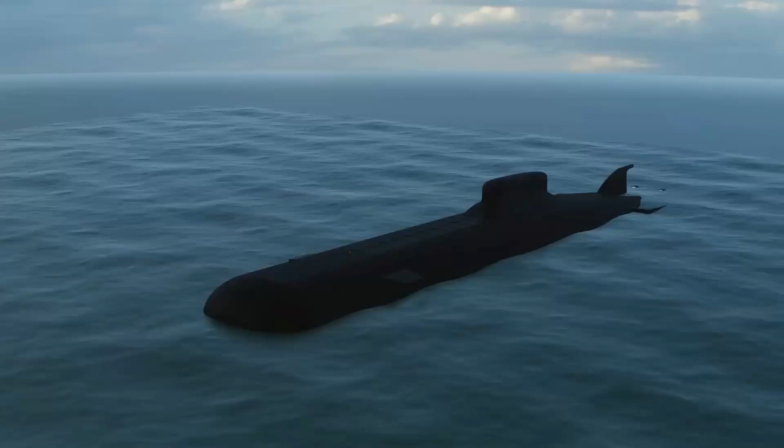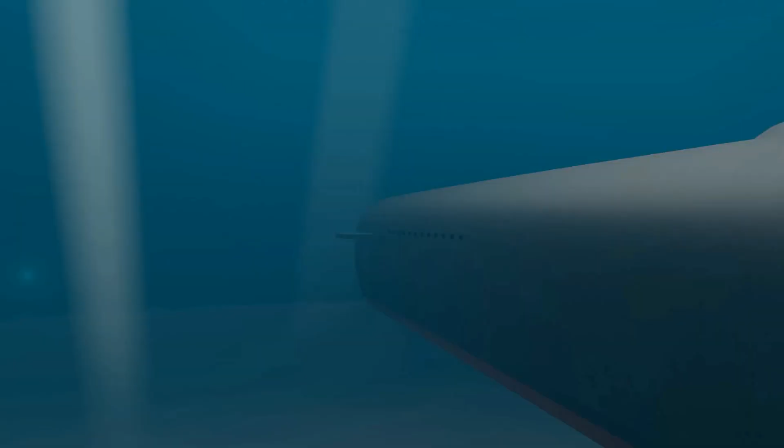It is a Typhoon-class nuclear-powered submarine whose weight is 48,000 tons. And there is a huge ship on the side with a load carrying capacity of 240,000 tons. It is a matter to think that such a heavy ship floats comfortably on the water, and the submarine can easily go into the water while it is 1/5 in weight.

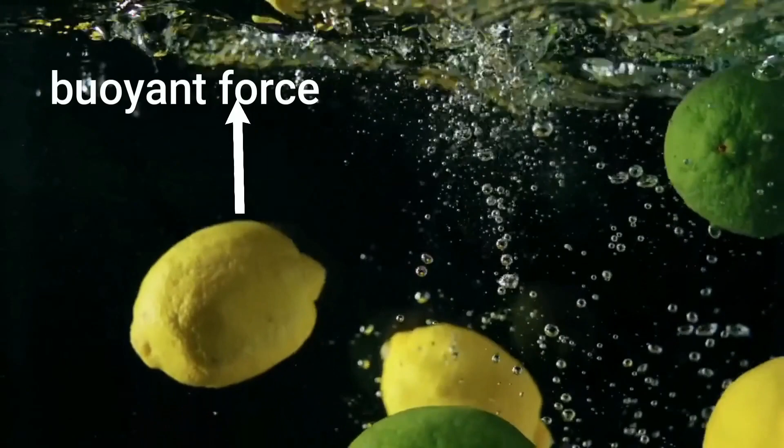When any body is in water, the water exerts an upward force on that body, which is called buoyant force, and the gravitational force tries to pull that body down, and both these forces are available in the water. Using buoyant force, Archimedes gave a principle that, when a body is immersed in water, that body will start displacing water. Now the weight of the water displaced by this body will be equal to the buoyant force exerted on it. It is very good. But still we do not understand anything.

The weight of this submarine is 48,000 tons. When it stays above the water, it is assumed that it can displace only 40,000 tons of water. Now it will be equal to 40,000 ton buoyant force, which means 40,000 ton water is exerting upward force on this submarine. But I just told that there is also a gravitational force whose formula is mass times gravitational acceleration. Now if the gravitational force exceeds the buoyant force, the submarine will sink.

So the simple thing to do is, when the submarine is about to go into the water, to increase the gravitational force. It will start increasing its weight, and to increase the weight, there are tanks on the bottom side of the submarine, which will start filling with water, and as soon as the gravitational force is high, the submarine will start going down. The large ships displace a lot of water so that the gravitational force does not dominate and the ship moves comfortably on the water.

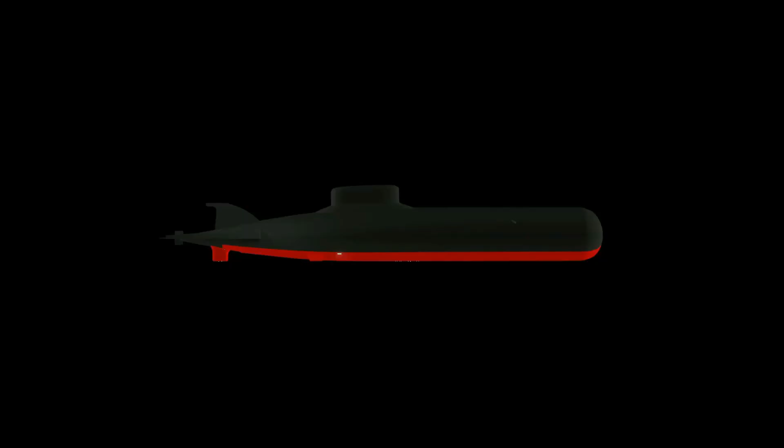The Typhoon-class submarine is still with Russia, whose power we are yet to know. Nuclear weapons can also be launched from this submarine, and it simultaneously carries so many weapons that the whole Earth can be destroyed. This submarine is 574 feet long, 76 feet wide, and 38 feet tall. If it is compared to a human, it will be something like this.

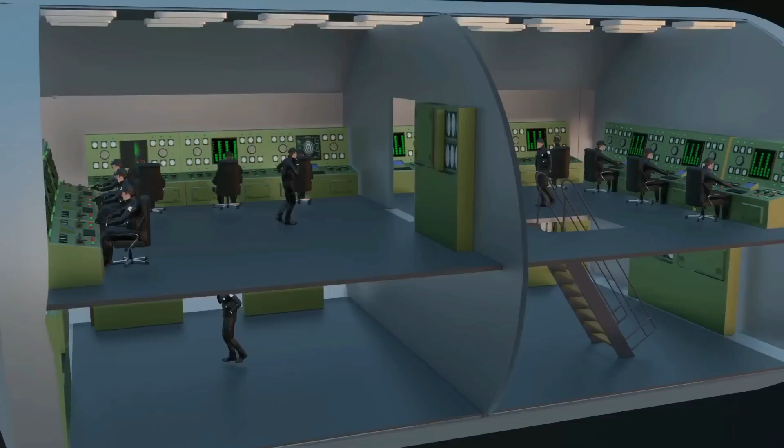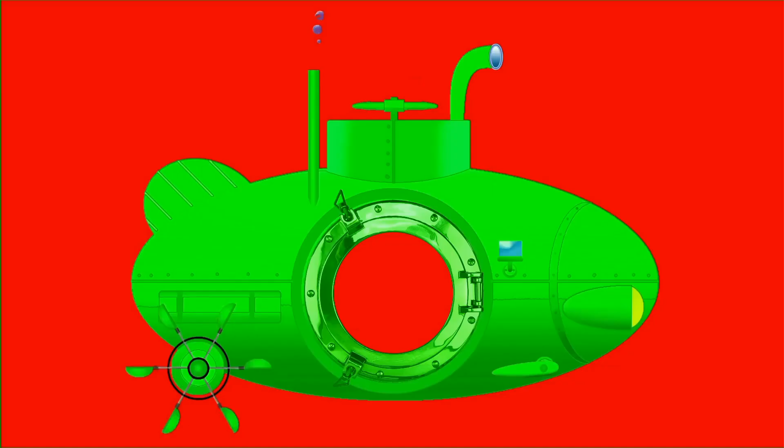Living facility is available for 160 people in this submarine, and it can stay underwater for 120 days without coming out, whereas diesel-electric submarines have to come up once in 10 or 15 days, because the diesel engine emits a lot of exhaust due to which bubbles are created in the water and its privacy is lost. That's why the diesel submarine charges the battery on the surface and then goes back into the water.

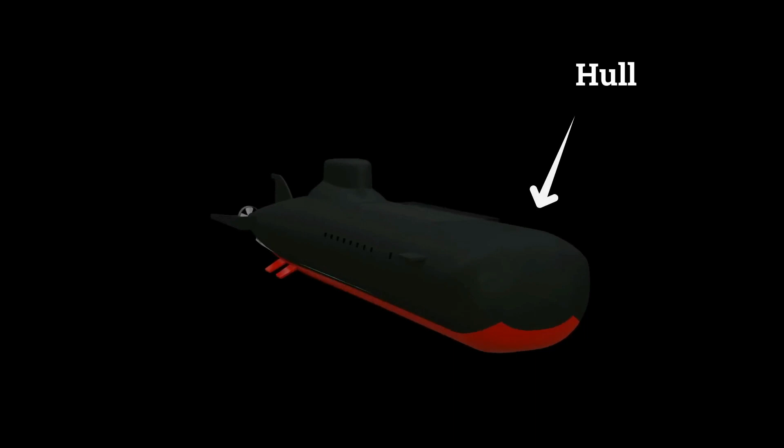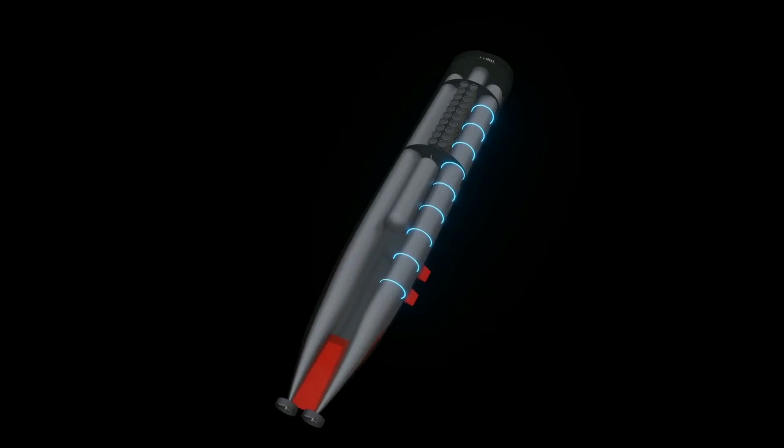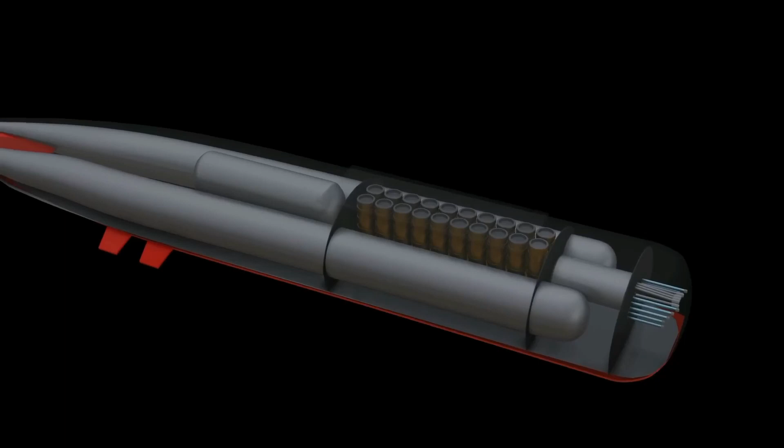The outer body of the submarine you are seeing is called hull, but inside it there are total 5 hulls. There are 2 large main pressure hulls on the side, which are made of strong steel, and each hull is divided into 10 compartments. And in these compartments, sleeping room, kitchen, bathroom, gym facilities are available for crew members. On the rear side, there is the engine room, that has the nuclear reactor for power generation and propulsion of the submarine. The submarine has a torpedo hull at the front, from where the missile ammunition is launched.

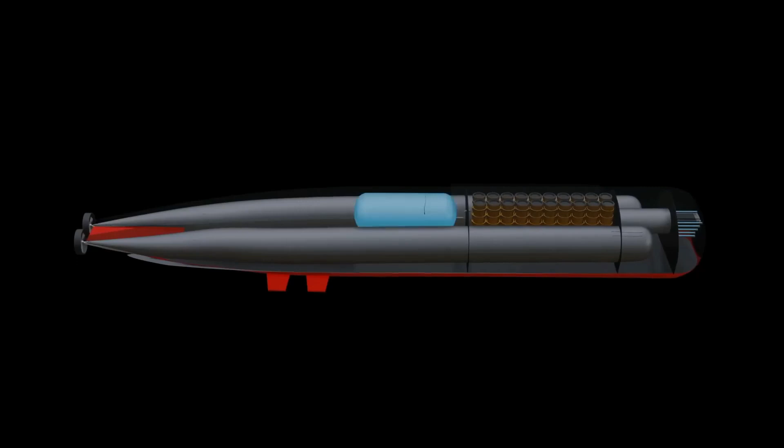The torpedo compartment does automatic launching, it just needs to be signaled from the control room, and the control unit of the submarine is in its center portion from where the crew members work. Submarine driving control, going down in the water, going up, surfacing, etc. All are controlled from here, but the interesting thing is that there is no window to see outside the submarine. Everything is controlled through sensors from its control room. Submarine is just like a box, which makes minimum movement with water.

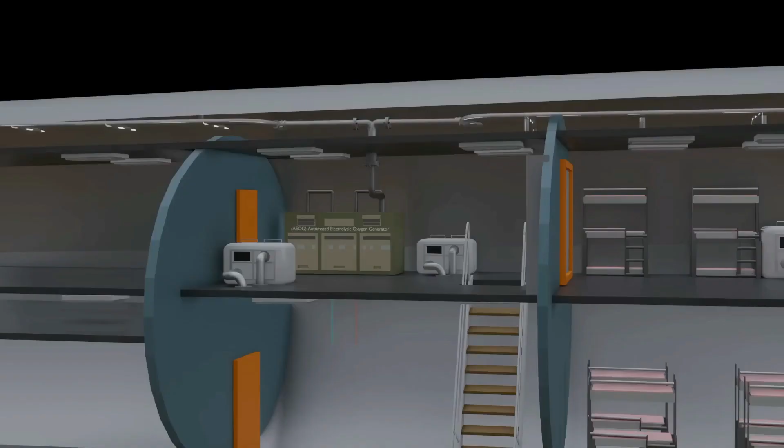Inside things inside, outside things outside, so an electrolyzer is installed to supply oxygen to so many crew members. Electrolysis is a process in which oxygen is extracted from water. If you know, oceans supply 50% oxygen on Earth, so oxygen is much available inside water, but electrolysis is used to separate it from water.

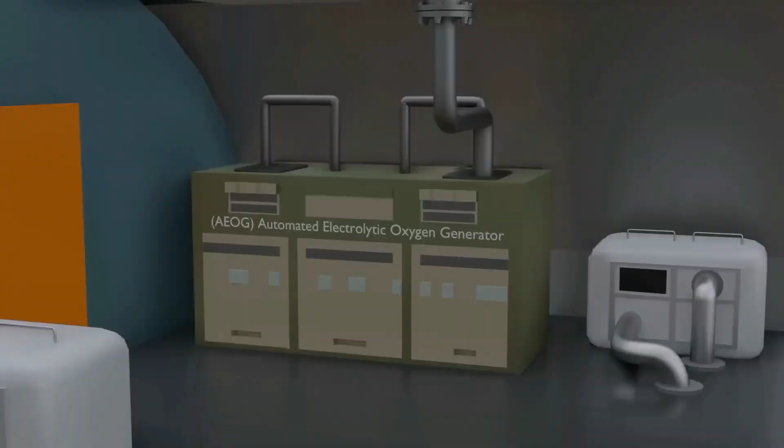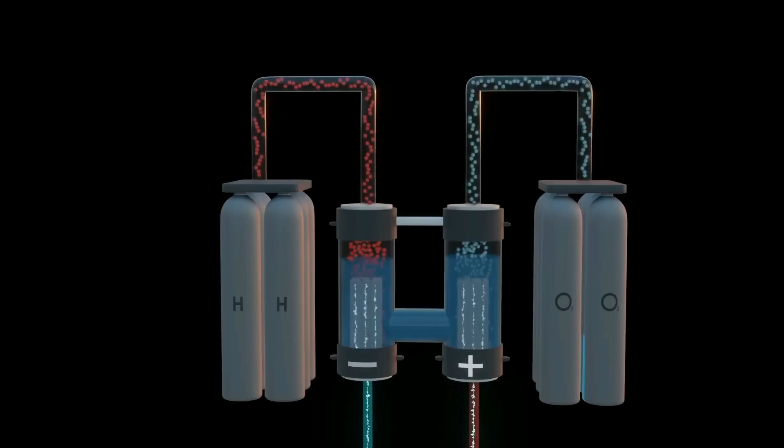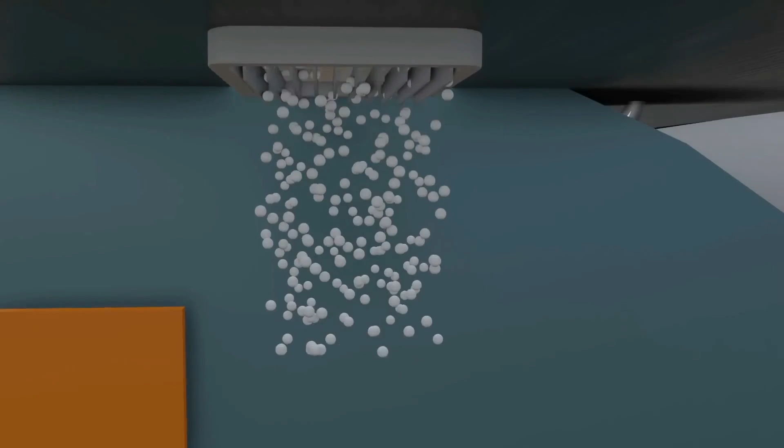There are 2 graphite rods in different chambers. When DC supply is given to them, oxygen will be released from the positive electrode side and hydrogen will be released from the negative electrode side. Both these gases are stored in separate tanks. Oxygen is supplied to the entire submarine through these pipes, and hydrogen is released outside. Submarine has a powerful electrolyzer, which produces 4,000 liters of oxygen in 1 hour. Yet oxygen is supplied periodically.

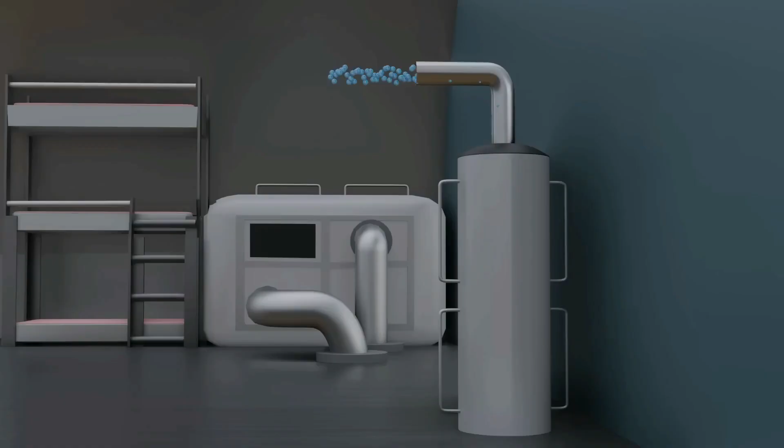There may be a power failure, and this system may not work, so for backup, chlorate candles are used for oxygen supply, which do not require any external power source. These candles are sealed in a steel canister.

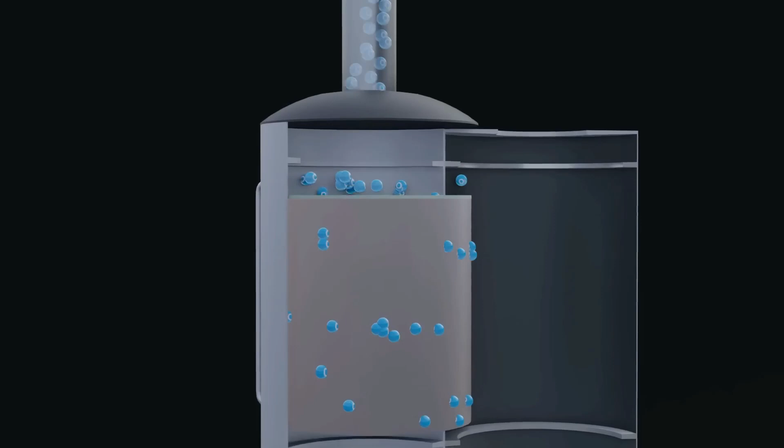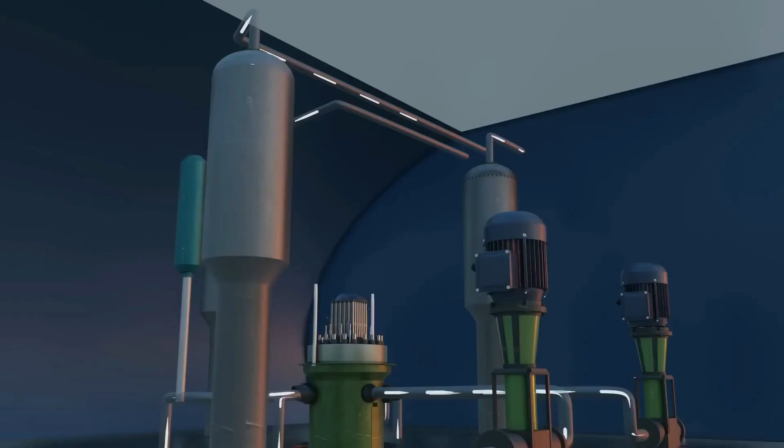Iron powder is filled in the middle of the candle and sodium chlorate on the side. So when oxygen is needed in an emergency condition, the iron powder is ignited, which generates heat, and the chemical reaction starts at 600 degrees Celsius. And oxygen is released in tremendous amounts.

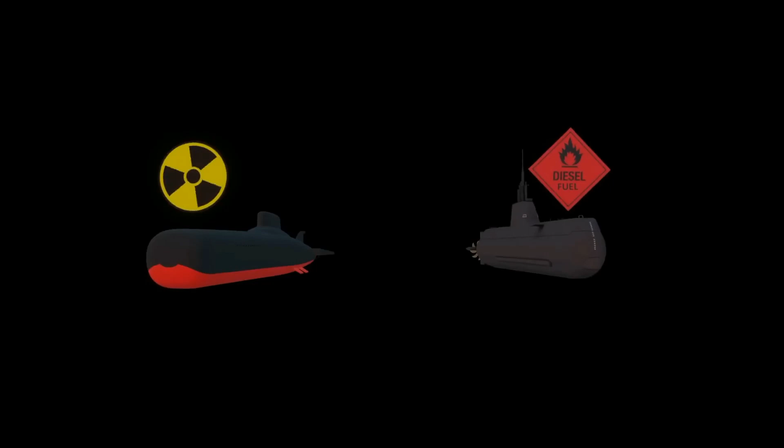In a nuclear-powered submarine, a nuclear reactor is used for power generation and to propel the submarine, in which uranium-235 is used as a fuel. This reactor can generate continuous power even underwater, because unlike a diesel engine, it does not leave any exhaust outside. If we compare it with a diesel-electric submarine, then 5 million liters of diesel is equivalent to 4 kilograms of uranium.

And the more interesting thing is that there is no need to come out for refueling a nuclear-powered submarine, because when the submarine is manufactured, so much uranium is filled in it at the same time that it does not have to do any refueling for the next 30 years. Because uranium is not like diesel or petrol, which needs refilling often.

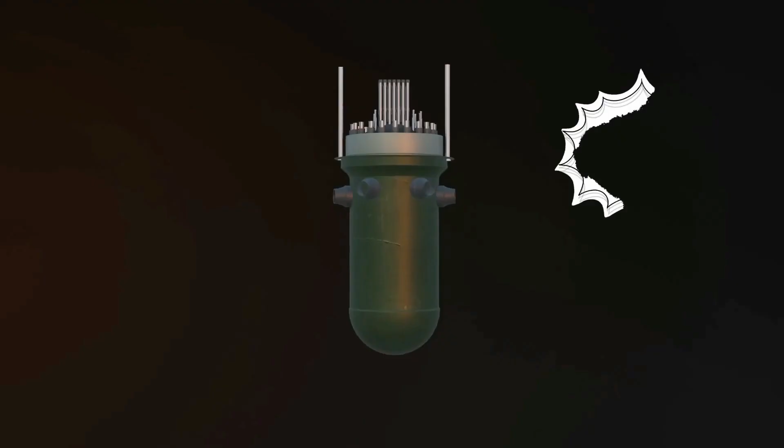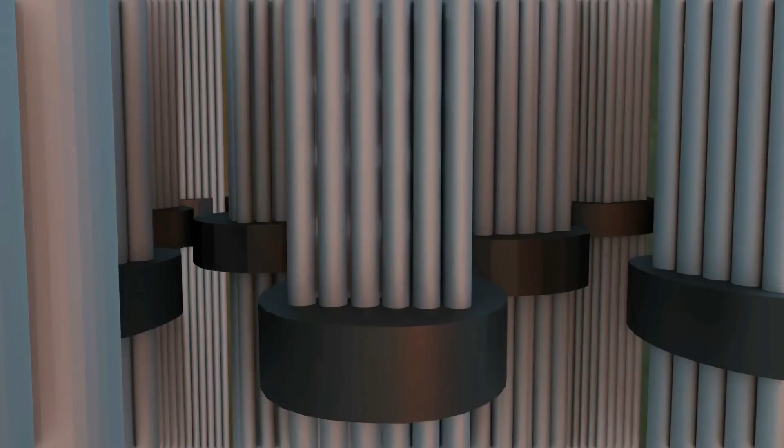There are 2 pressurized water reactors in the submarine, in which there are many such tubes. Inside these tubes, small pellets of uranium are set in such a way that they are sealed in a metal tube. And many of these tubes make a whole bundle of fuel, and in the reactor they are set in this way. When the reactor has to be started, the process of nuclear fission is started here.

When a neutron is added to a uranium atom, it breaks into 2 atoms, and neutrons are released from this break. And energy is also released. Now both these neutrons will attack the next atom, due to which the next atom will break again, and energy and neutrons will also come out. In this way a chain reaction takes place here. Set off a uranium atom, it will break the next atom and release tremendous energy.

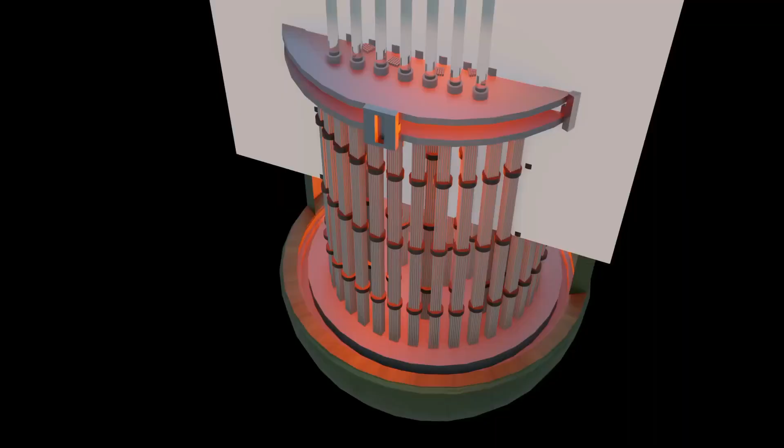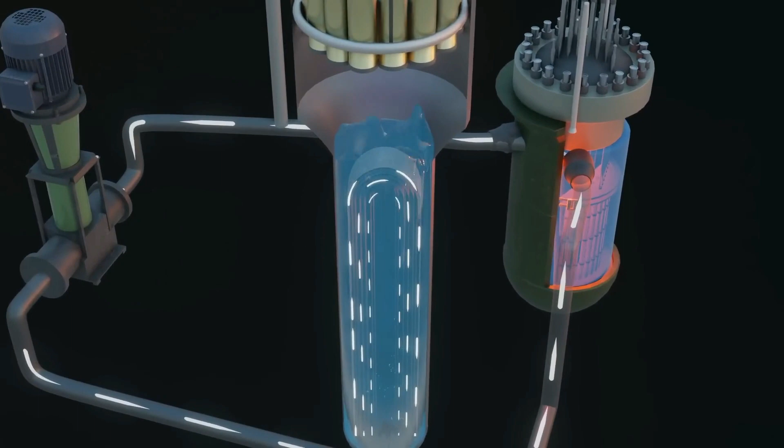Here the water is filled around the metal tubes. When energy is released from the fission process, the water is heated by it and sent forward to the steam generator. There are many U-shaped tubes in the steam generator, through which this heated water flows, and there is another source of water inside the steam generator. So when this water comes in contact with the reactor water, it will get heated and turn into steam.

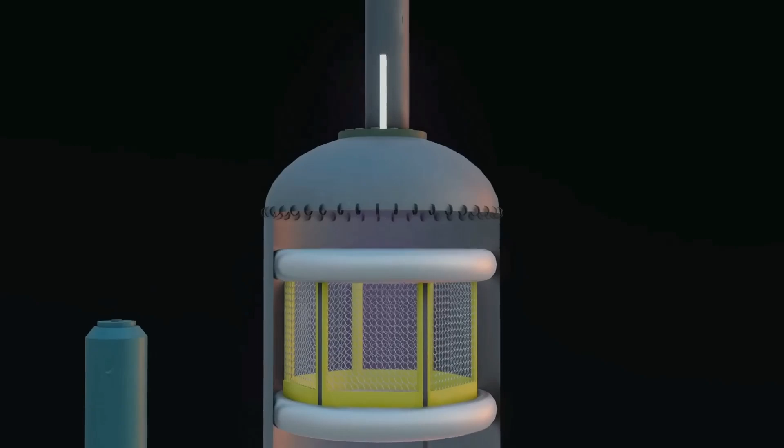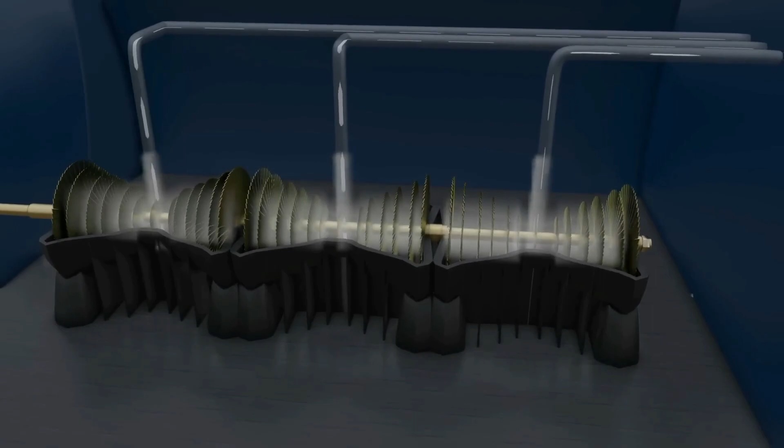There are 3 steam generators with a reactor, and steam is sent from these steam generators to the turbines, which rotate the turbines. Now the power of the turbine is not given directly to the propeller, because the turbines rotate at a very high speed. So a powerful gearbox is used to control their speed, and the power from this gearbox goes to the propellers that propel the submarine forward.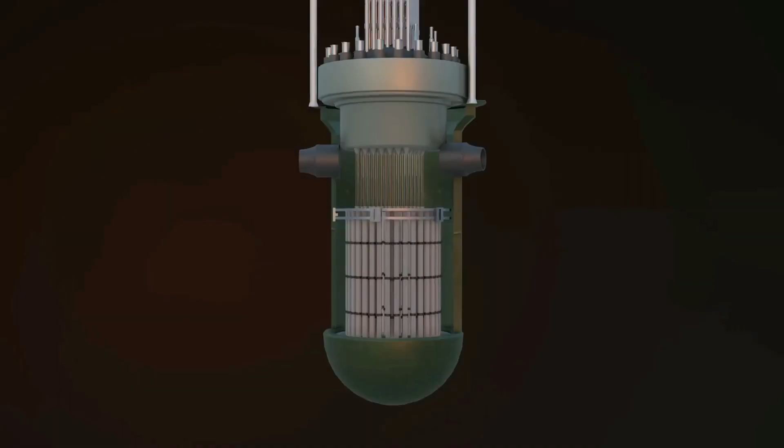You know uranium is a radioactive material, so it can cause a lot of harm with its radioactivity. So the reactor is packed completely. A nuclear submarine can carry many weapons. This submarine can also launch missiles, and the missile system is between the 2 main pressurized hulls of the submarine. But it is a matter to think about that the rocket engine needs air to burn, so it cannot run in water. Then how is the missile launched from the submarine?

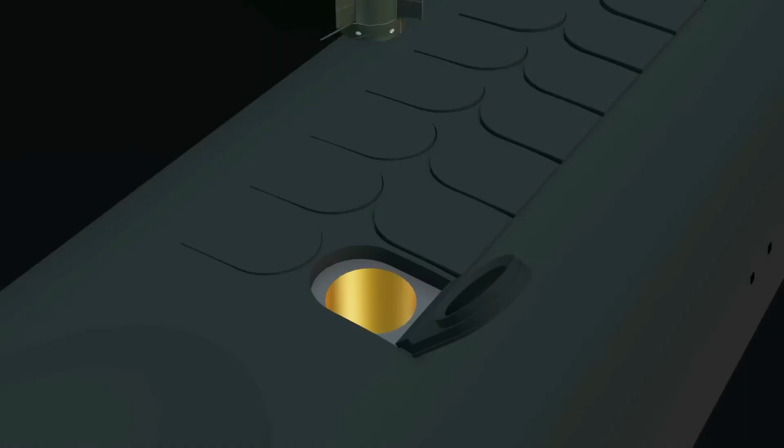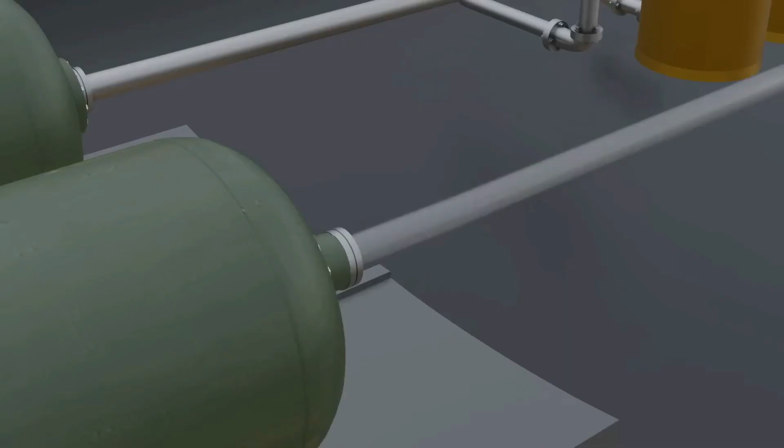When the missile has to be launched, its cap is opened, and there is a launch tube under this cap. The launch tube is also packed tightly so that water does not go into it. Compressor tanks are used to launch these missiles, so when the missile is to be launched, the compressor tanks will start compressing the air under the launch tube. When the pressure increases, the seal will break from above, and this air pressure exerts so much pressure on the missile that it will be launched from the sea with a speed of 80 kilometers per hour.

This pressure is sufficient for the missile to reach the surface, and as soon as it reaches the surface, its fuel will ignite and it will start moving towards its target. A submarine can go 400 to 500 meters or up to 800 meters deep. At greater depth, the ocean puts a lot of pressure on the submarine, due to which such a big body gets squeezed like a box. So a submersible is used to go deeper.

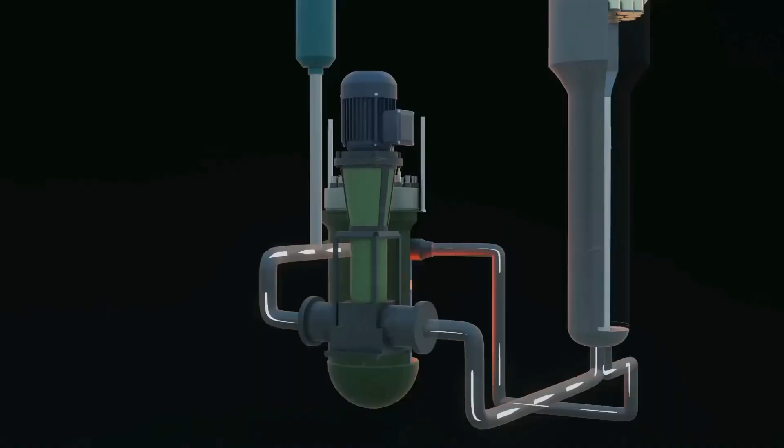Power generation continues in nuclear-powered submarines, and unlike diesel-electric submarines, they do not have to carry extra batteries and fuel, due to which their power has increased a lot, but their cost is 2 to 3 times more than diesel-electric. I hope you got some information from this video.